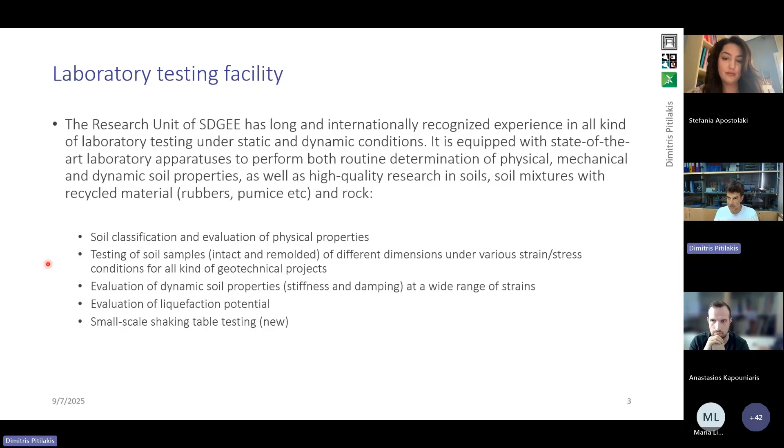Soil classification, testing of soil samples, evaluation of dynamic properties, evaluation of liquefaction potential, and a small scale shaking table that we are currently using. But again, as I said, Tassos Kapouniaris will talk about this more.

Then we have a big natural laboratory, as we say, where we do many kinds of field testing. So basically, the natural laboratory, as we call it, is outside of Thessaloniki, at the exact epicentral position of a big earthquake that happened about 45 years ago in Thessaloniki, in 1978.

This place is called EuroseisTest, and it provides an instrumented site to perform multidisciplinary studies in soil dynamics, earthquake engineering, engineering seismology, site effects, wave propagation effects. So it's fully instrumented. Imagine that it is the longest running instrumented array in the world because it has been in continuous operation since the early 90s.

And it is instrumented with approximately 25 instruments in three directions, north-south, east-west, and we are recording earthquakes down to the bedrock, which in this valley is at almost 200 meters. Then all these data are used as a basic input for research towards seismic risk assessment and mitigation.

So it inputs models. It is a valley which is very well known because we studied it for the last 30, 35 years. So we know the exact 3D geometry. And it produces a unique database of high quality seismic records. We have been continuously recording earthquakes since the early 90s.

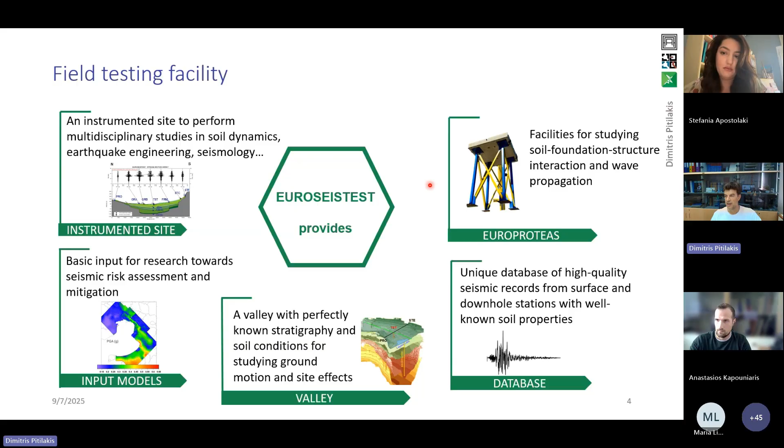This is the strong motion database that we have in our lab, and it records all the earthquakes that have taken place since the early 90s. It is open to the public, so anyone can browse and download earthquake recordings, small earthquake recordings so far, but if we are lucky, we are going to record also a major one.

Now, another big aspect that we have been working on is the field monitoring that we principally do in this EuroseisTest valley. So we are doing 2D and 3D geological and geophysical models with extreme detail, as you can see here to the right.

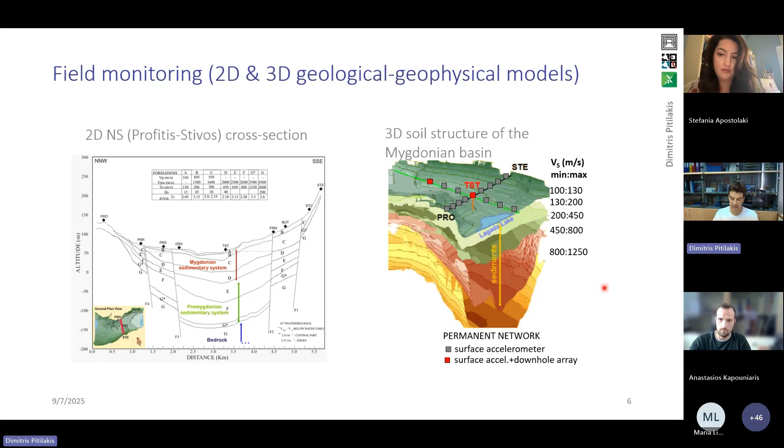Anything with geophysical tests, surface accelerometers, and downhole arrays down to the bedrock. Then another aspect of our research focuses on microzonation studies. We have performed microzonation studies, if I'm not mistaken, in more than 6 or 7 cities in Europe.

And we can get results or data that looks something like that. So this is, let's say, the spectral acceleration. This is Thessaloniki. This is actually the port of Thessaloniki. So this is the spectral acceleration as output from a microzonation study for a certain earthquake scenario. This is the spectral acceleration for a period of 0.6 seconds.

These are all useful information for big projects like the construction of the metro line, the underground, the subway line, which passed somewhere over here. And then they used our results in order to seismically design the tunnels and the stations.

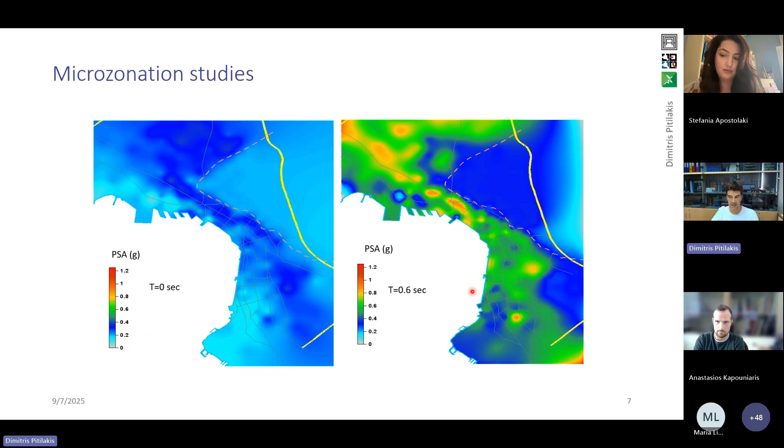Then moving forward, lately we have been working a lot on seismic vulnerability assessment. So we deal with cities. This is again the city of Thessaloniki, where for an indicative earthquake scenario, we have the damages in 5,000 buildings. Some of them are green, yellow, and red. This is traditional marking depending on the damages.

And again, here we can see an aggregated distribution based on the municipalities of Thessaloniki. You can see that, for example, these 26,000 buildings, most of them, 2/3 of them, are going to be yellow. So they are going to have slight to moderate damages.

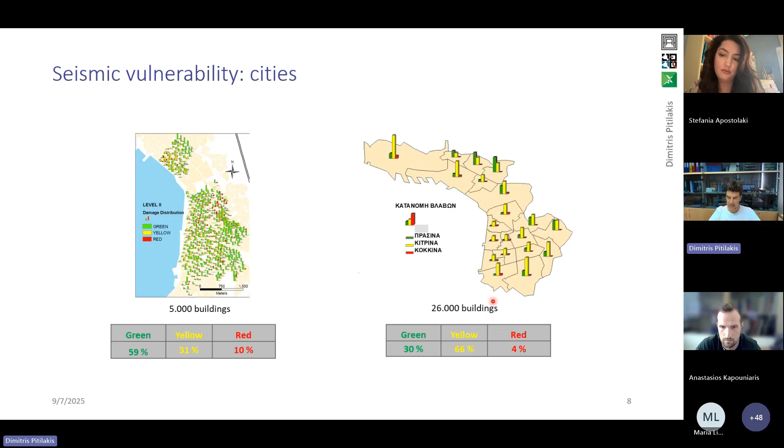Then we expanded our research to the seismic vulnerability of networks. This is important because, for example, everything is interconnected. So this is the road network of Thessaloniki, this is the bridge network of Thessaloniki, and we are starting to see what's going to happen, for example, in the road network if a bridge here to the, let's say, south of Thessaloniki has important damages.

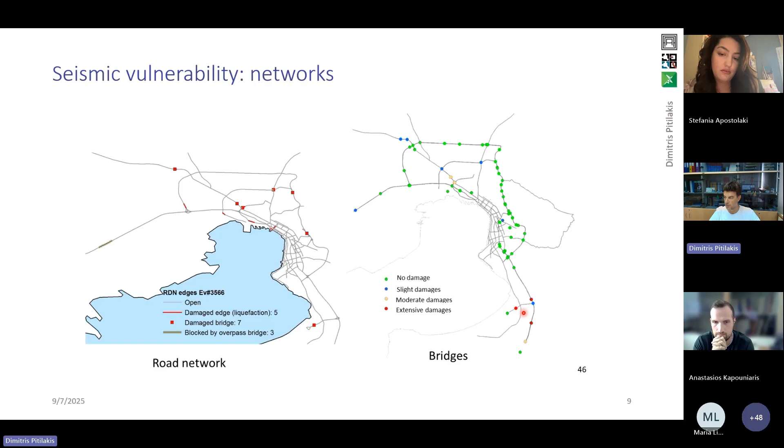Actually, this bridge here, where you see the laser pointer, is a bridge that connects the airport to the main road. So basically, in a given scenario of an earthquake, this bridge will be damaged, and this means that there is not going to be immediate access to the airport. So this is important.

Then we are studying systemic vulnerability. What is systemic vulnerability? It has to do with all kinds of lifelines. So basically, there are intra- and interconnected, intra- and interdependent systems. This means that, for example, in the water system, if there is an electricity breakdown because of an earthquake, then probably a pumping station...

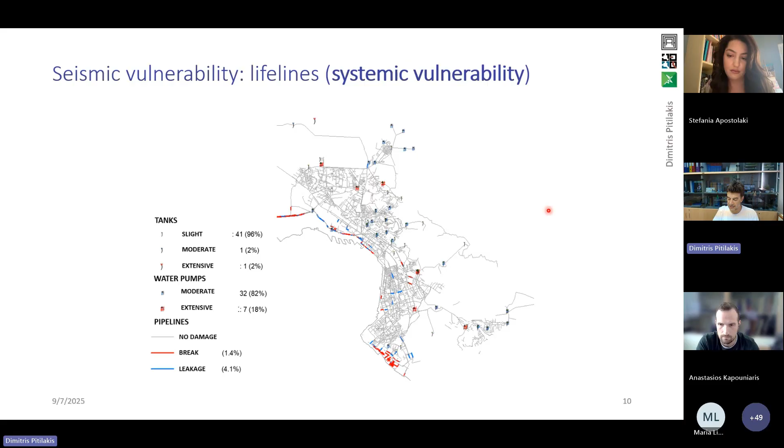Here is the water network, right? So probably a pumping station is not going to work, which means that if there is a fire because of natural gas somewhere in the city, maybe inside the pipelines there is no water in order to put out the fire. So this means that all the systems are somehow interconnected, and we have been studying this for the last 6 or 7 years.

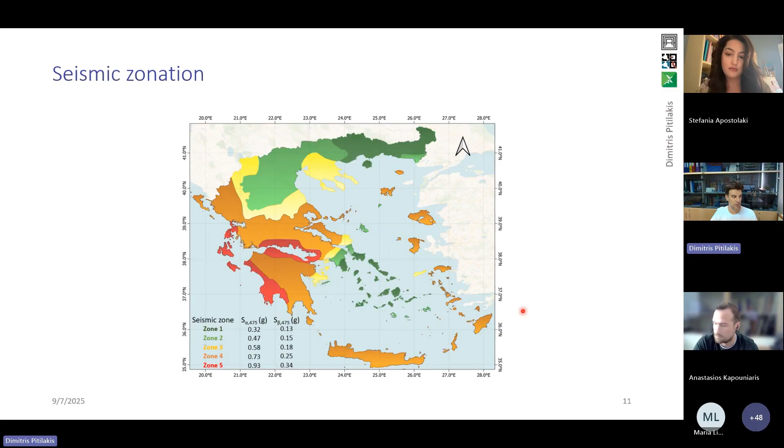Then another aspect of our research focuses on seismic zonation. Stefania will talk more about this. So depending on the region that we study, this is the whole of Greece, we are proposing updated earthquake hazard maps, zonation maps, in order for the engineers to be able to design the structures to resist earthquakes with as accurate a representation of the hazard as possible. But Stefania will talk more about this next.

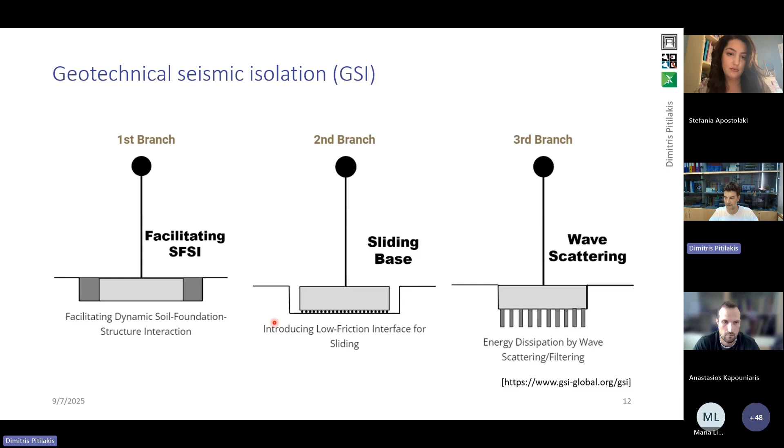Then another branch of our research is geotechnical seismic isolation. This is a very low-cost isolation that essentially focuses on intervening at the soil beneath the foundation or around the foundation. And we have been doing large-scale testing in Europroteas and EuroSeisTest.

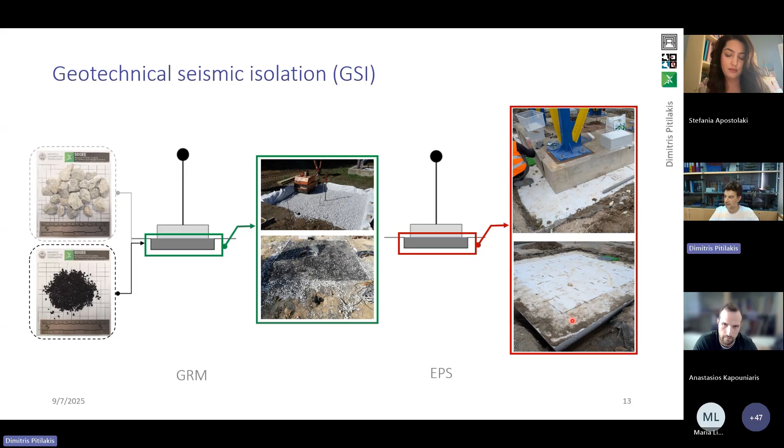Basically, we can see that here we are using gravel and rubberized tires, recycled tires, and we created a layer below the foundation. You can see here, this is more black than the gravel only on top. And then we placed the Europroteas structure on top, and we produced a shaking and recorded what's happening, the response. Here we did the same with EPS, expanded polystyrene, below the foundation.

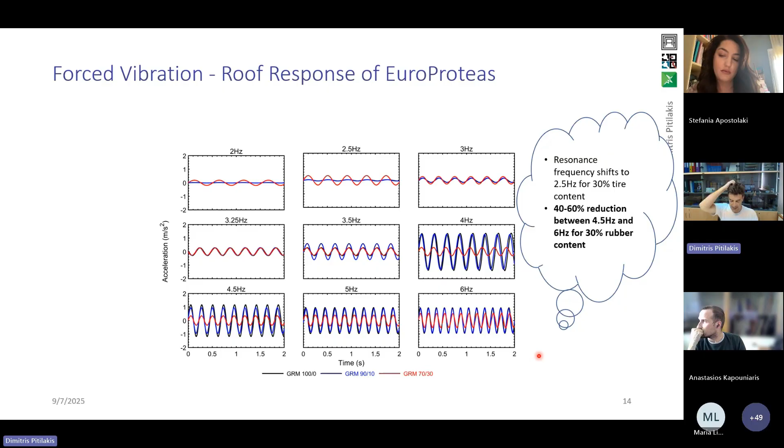So basically, we can see that using this kind of geotechnical seismic isolation, there is a reduction of 40 to 60% in the actual response, which means a reduction in the earthquake shear and moment forces that are transmitted to the foundation.

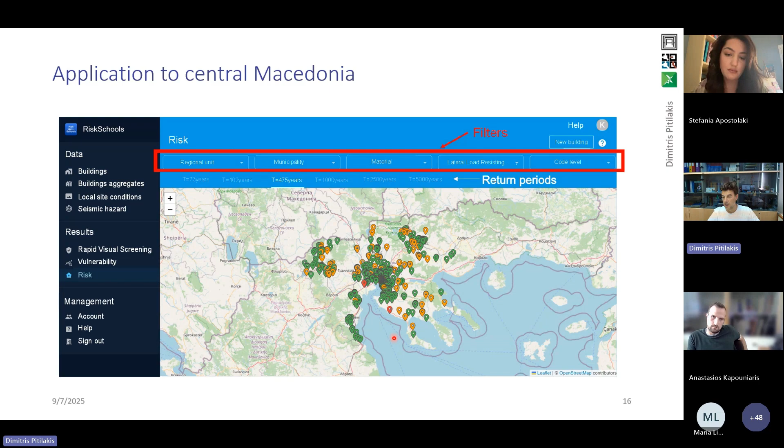It is something like 2,300 schools, and for a given hazard, let's say regional hazard, this is a scenario with a return period of 475 years, we can see that depending on the material and the lateral load resisting system that one inputs, we can have immediately the risk or the vulnerability, if you like, of each one of these schools. And this is very important for the prefecture, because then they can immediately go and assess, for example, the red buildings that need retrofitting or whatever the stakeholders think it's best to do.

Another thing that we have been working on is the urban scale risk assessment. Chiara is going to talk more about this. So basically, we've extended our vulnerability and risk assessment from a single structure to a city or a region. And this we do by including also soil structure interaction, so the presence of the soil. This, as you will see in Chiara's presentation, changes a lot.

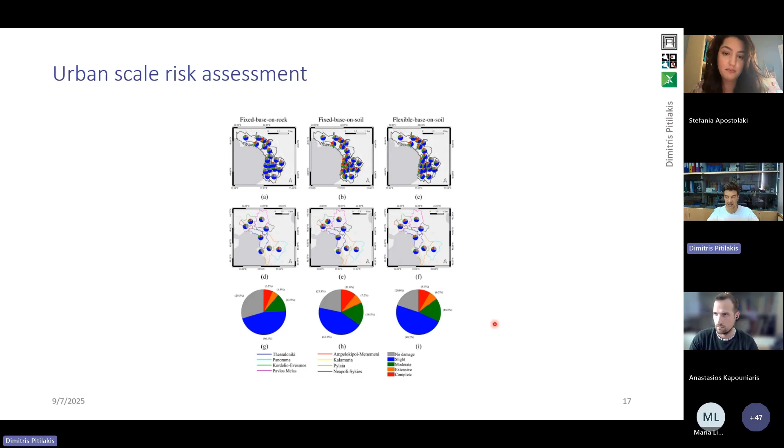Now, just in short, right now our laboratory is involved in 4 big European projects with a total budget of 2 million euros, maybe more than 2 million euros. And as a very conservative estimate, we have participated in more than 30 projects, mostly European, national also, with a total budget of more than 10 million euros in research targeted towards geotechnical earthquake engineering and risk assessment.

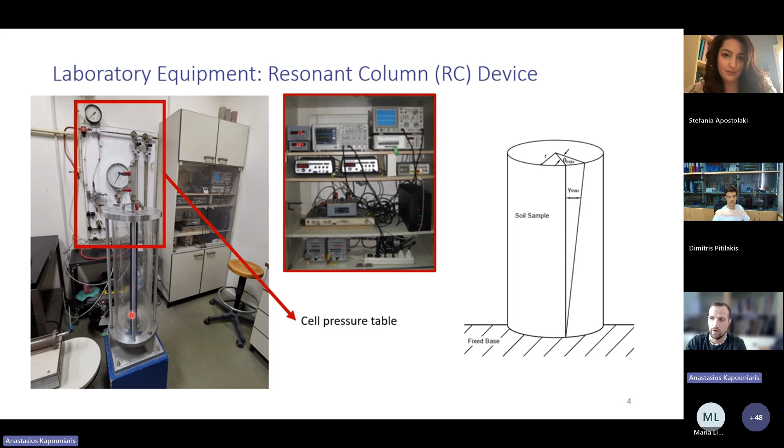And this here is the electronic equipment where we can adjust the function of the devices and actually make the estimations that I'm gonna talk to you about later. So

This device has the ability to work in both torsional and longitudinal excitation. As you see here in this picture, this is a soil sample. We have fixed the base, and on the top, we can apply either a torque, like a sinusoidal torque, a harmonic torque, or of course a longitudinal force. In that way, as I can show you in the next slide,

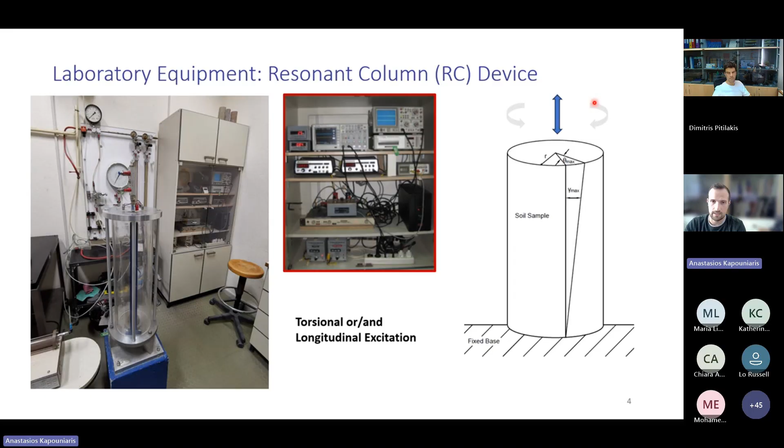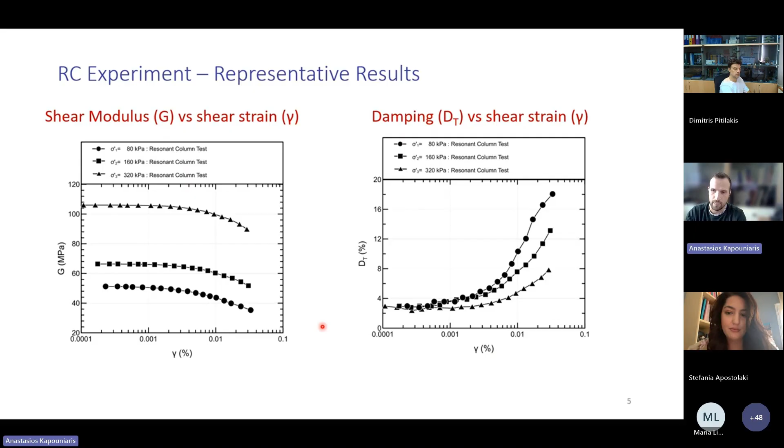we are able to measure the reduction curves of the shear modulus and also the damping of the material, as we call it also G-gamma-D curves, shear modulus, shear strain, damping curves. Here in these diagrams, you can see on the left there are shear modulus versus strain and damping versus strain for sand specimens.

Next, we have a new cyclic triaxial device. We have performed many tests, more than 500 tests. It's fully PC digitalized, and all the data or the results are gained via PC. Of course, we use cylindrical specimens. It has many abilities. And of course, there is the option to add bender element tests, which are gonna be more specific later.

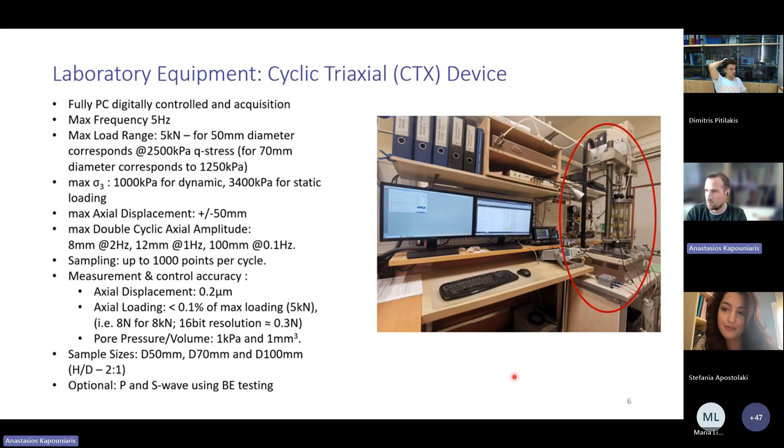For cyclic triaxial experiments, now I'm showing you some representative results that we have made in the past. These are two types of tests that we perform. On the left, there are the strain-controlled tests, where we can calculate shear modulus or elastic modulus and damping parameters. From these stress-strain loops here, we can go to these diagrams, which are shear modulus and damping versus the strain. On the right, of course, we are able to perform stress-controlled tests in order to define the liquefaction potential, mostly for granular soils, sand soils, etc.

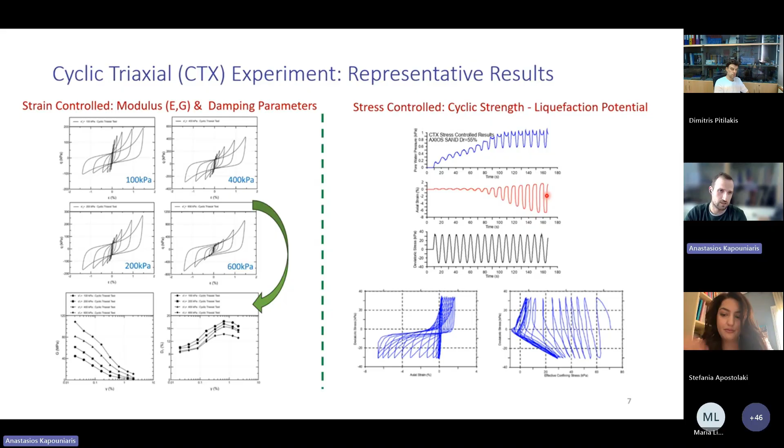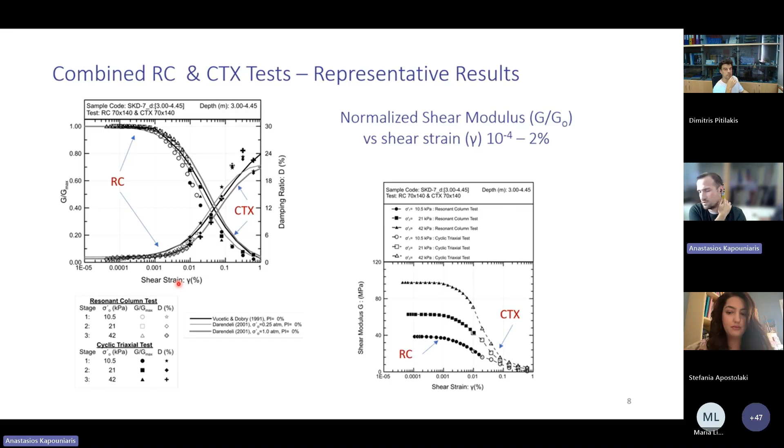So, of course, in our lab and with our experience, we are able to combine resonant column and cyclic triaxial tests. As you see in these diagrams, we have combined tests for the same material, a sand material. On the left of the diagram are results from resonant column tests, and on the right, there is the cyclic triaxial test. Of course, the reduction curves of the shear modulus and the damping increasing with the shear strain. It's a very common picture.

Next, bender element tests, a new way to define the shear wave velocity or the primary wave velocity, of course, under confined pressure. It's a non-destructive method. This is the soil specimen or a rock specimen, whatever we want to test, and we apply the wave that we want. We have a transmitter and a receiver, and we can apply either S waves or P waves. And it's very easy for us to do it in the same specimen; these tips are used for both S and P waves. So it's very adjustable.

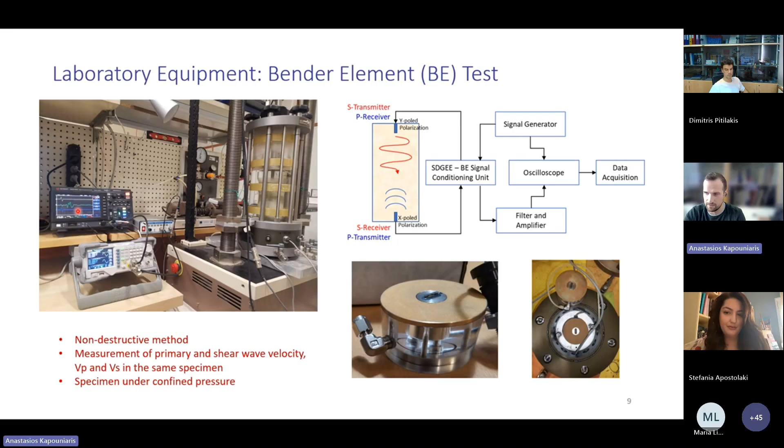As you can see here in this picture, it's showing a pulse, and then this green line here is the receiving pulse. As you can see also here in these diagrams, this blue line here is the pulse that we send, and this orange line is the receiving pulse.

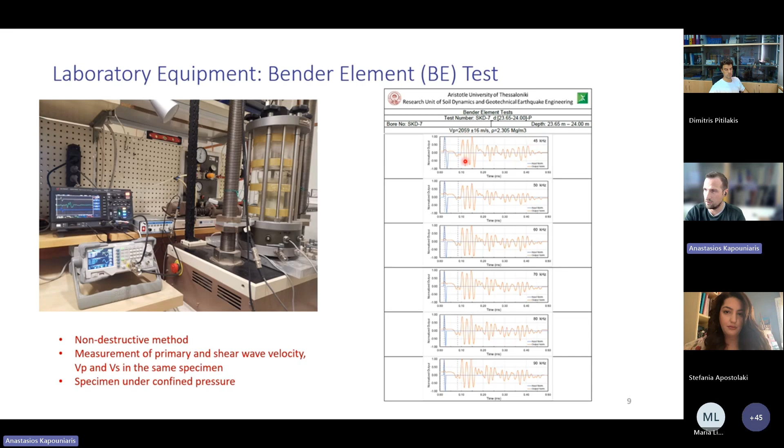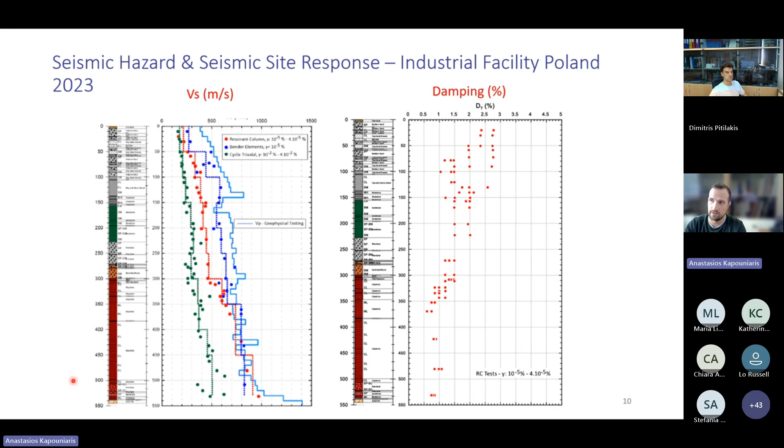From our work, we are able to make these profiles with depth and calculate the VS and the damping with depth. As you can see here, this is a borehole of more than 500 meters for an industrial facility in Poland. So

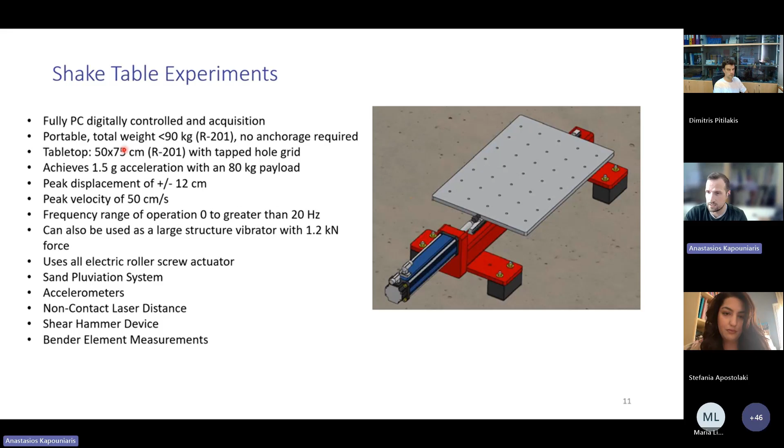let's continue to the shake table experiments. As Dimitris mentioned, this is a new device that we have installed in our lab. It's actually small, mostly for academic purposes, and it is uniaxial. It moves only in one axis, and it has a payload of almost 80; we can adjust it to 100 kilos and perform acceleration up to 1.5 g, as you can see here in the bullets. So I'm not going to go into the whole details of the equipment.

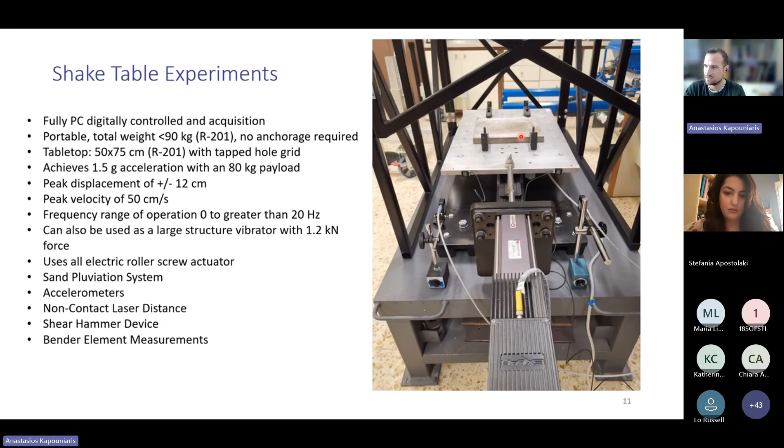This is a closer picture of the shake table in our lab. This is the actuator that moves the table, and you can see there is a steel plate above the table because we were doing some calibration in the past in order to calibrate the mass and the force.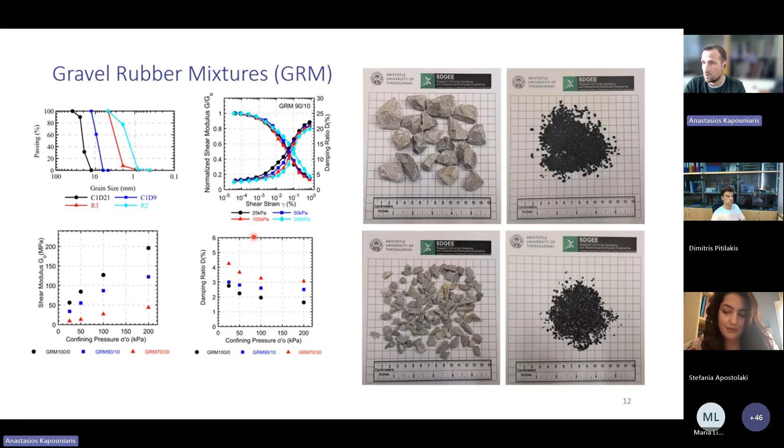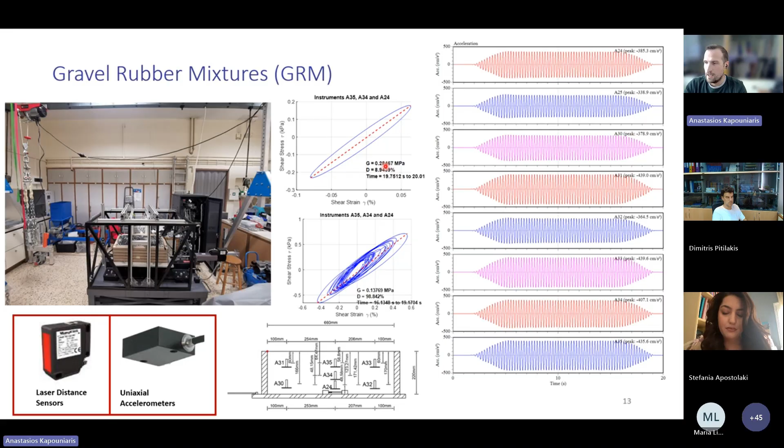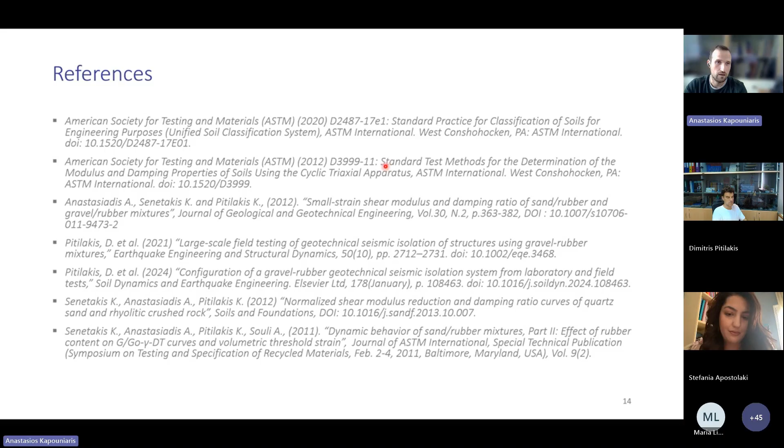As you see here in these diagrams, these are some results where we were able to determine shear modulus and damping from these tests. Of course, the work is still ongoing, so in the future there will be more results published in a journal. That's all for now. These are some references from our work and some standards that we use when we carry out the experiments.

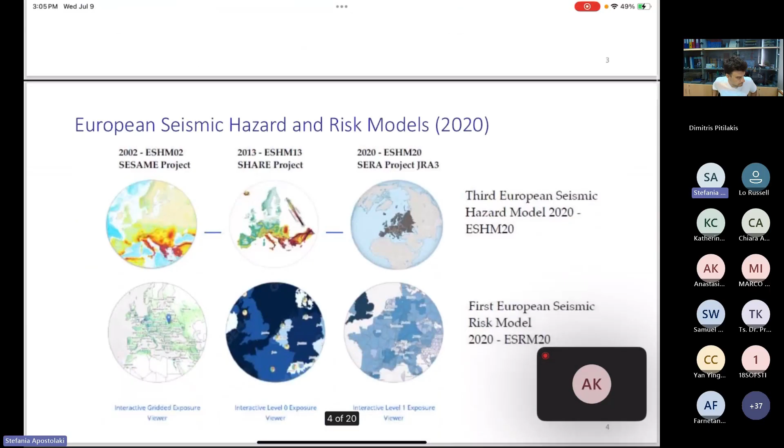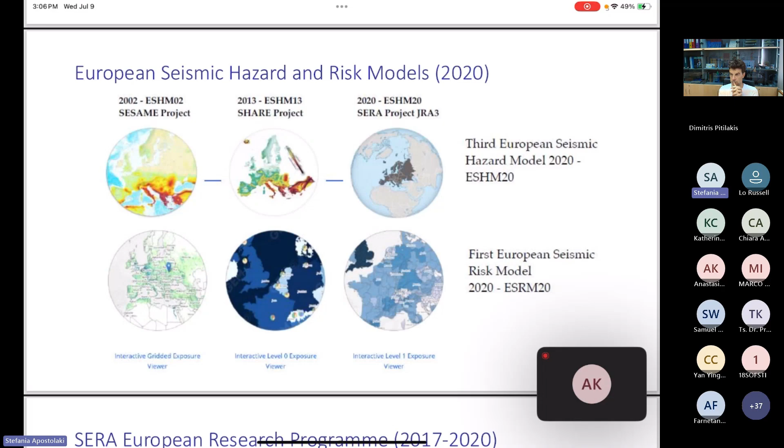Let's begin with ESHM20. ESHM20 is essentially a major update of the seismic hazard assessment in the Euro-Mediterranean region. It covers the whole of Europe and Turkey. It is a successor to a previous model, ESHM13, developed in 2013, and it supports the first European seismic risk model, ESRM20. These models have received funding from the European Union's Horizon 2020 Programme under the SERA project, and in this project many research teams across Europe collaborated with the Global Earthquake Model Foundation and the European Plate Observing System. Our team at Aristotle University of Thessaloniki, as Dimitris mentioned, was strongly involved in this effort.

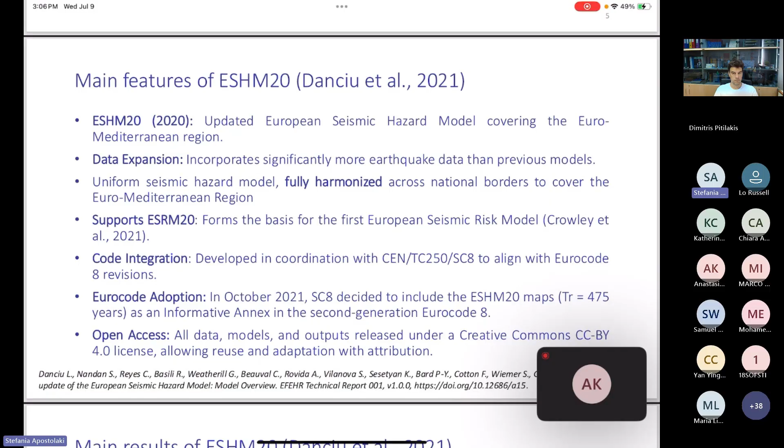So the main feature of ESHM20 is that it relies on a fully probabilistic framework. It incorporates significantly more earthquake data than previous versions. One of its main strengths is that it is fully harmonized across national borders, and a major objective was to align its outputs with the needs of the revised Eurocode 8 by working closely with the subcommittee of the European Committee for Standardization that is responsible for Eurocode 8.

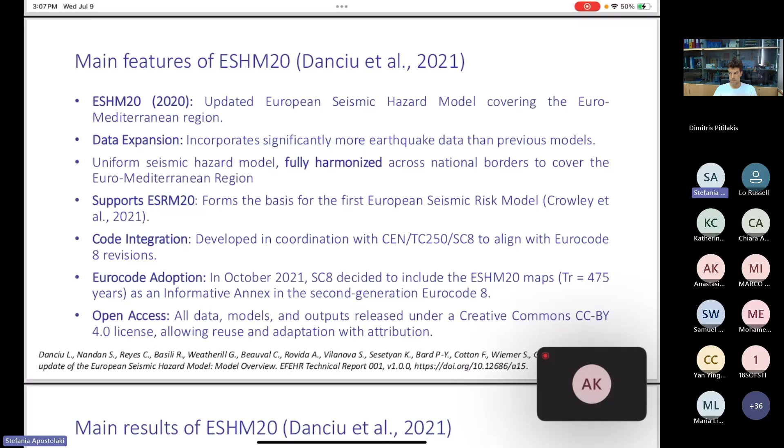In 2021, this subcommittee decided to include maps of ESHM20 as an informative annex in the second generation of Eurocode 8. All data, models, and outputs are freely available through the site shown at the bottom of this slide. Let's see the main results of ESHM20. The main results are more than 500 hazard maps for various intensity measure types, such as the PGA, which is the peak ground acceleration.

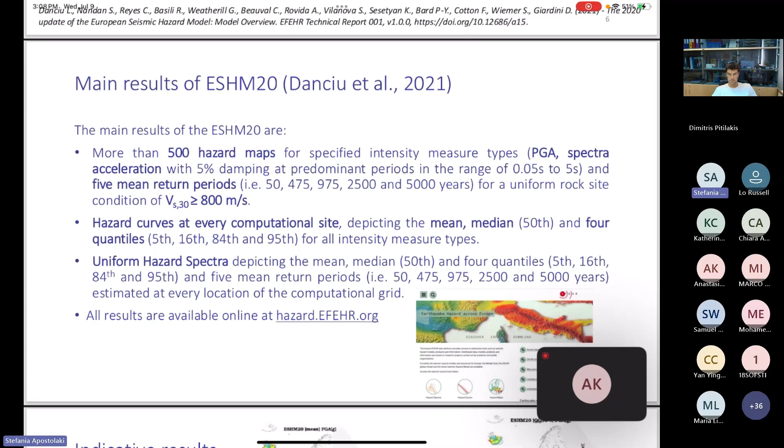It is a common metric, and spectral accelerations for various periods, and for 5 mean return periods from 50 to 5,000 years, and for rock conditions. Other results are hazard curves and uniform hazard spectra for every site, so for every location included in the study area, which is the whole of Europe and Turkey, at a dense computational grid. So we can have this information at every location.

Let's see some indicative results. These are maps of the peak ground acceleration, PGA, for a commonly used return period of 475 years. This is a very common return period. This represents the expected levels of PGA for an earthquake that happens roughly once in 500 years.

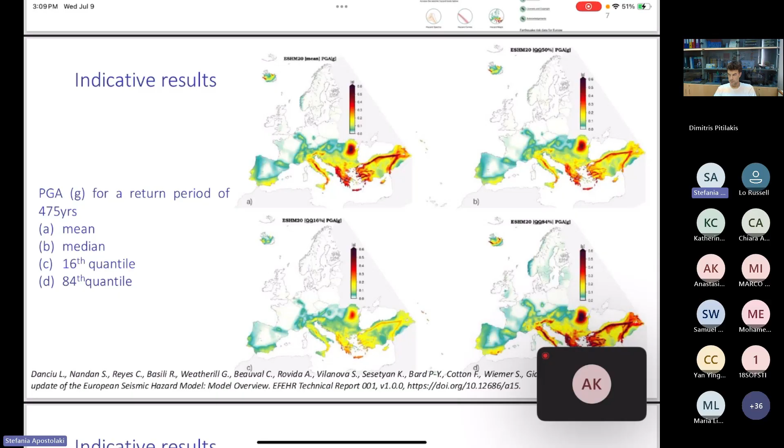Let's begin with the current zonation map. This map is included in the Greek National Annex of the current version of the Eurocode 8. It is in force since 2003, and it divides Greece in 3 seismic zones with PGA values of 0.16 g, 0.24 g, and 0.36 g.

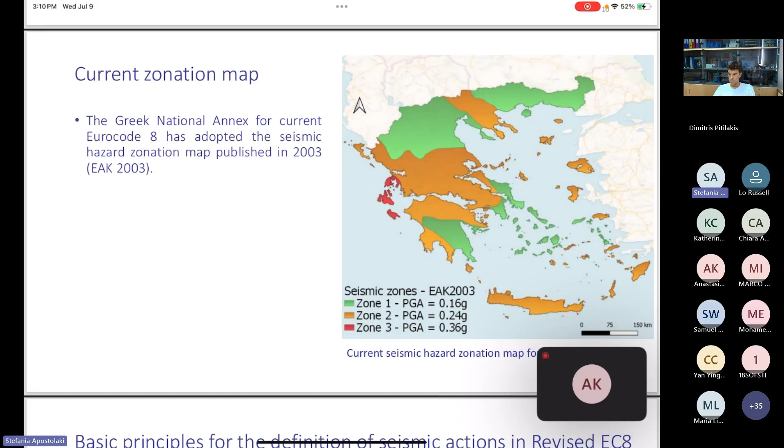In the upcoming revision of the Eurocode 8, significant changes are expected in the way that the seismic actions are defined. Now the basic parameter will not be the PGA, but we will need 2 other parameters: the S alpha, which is the maximum spectral acceleration that corresponds to the constant branch of the elastic response spectrum, the plateau value, as we used to say. This value is linked with the PGA by a factor F, capital letter A, which is almost equal to 2.5. So PGA is S alpha divided by 2.5.

And the second parameter that we will need is the S beta, which is the spectral acceleration at a vibration period of 1 second. We will use these 2 formulas here for the calculation of the S alpha and S beta. First, we will need the S alpha RP and S beta RP. These parameters will be included in the national annexes of each country, and they will refer to a specific return period, let's say for the 475 years, and for rock conditions. To these parameters, we will apply the soil amplification factors F alpha and F beta, and a topography amplification factor Ft.

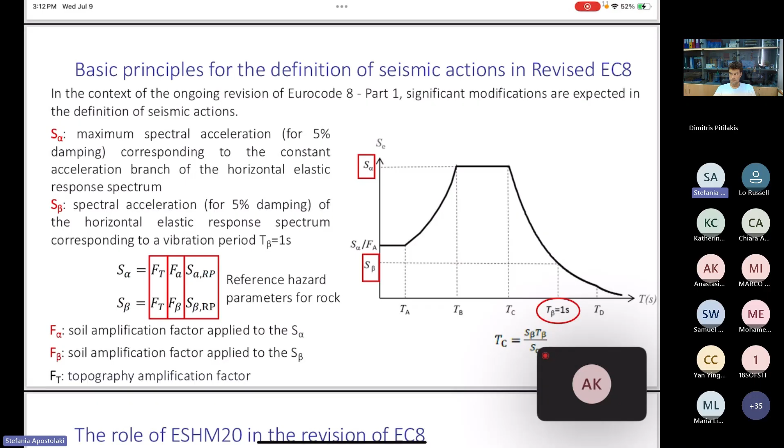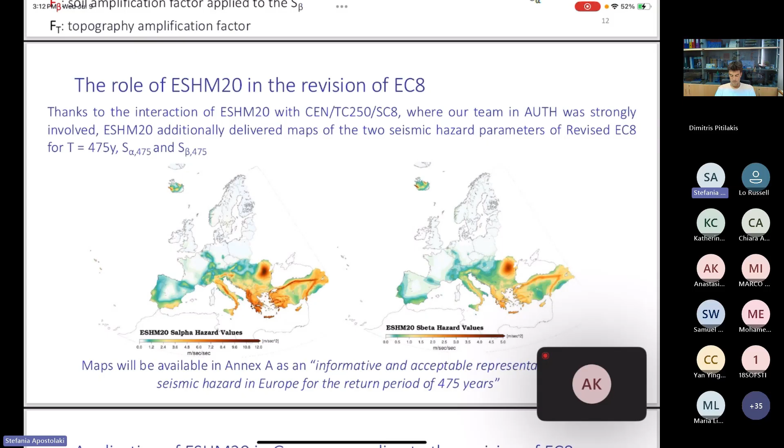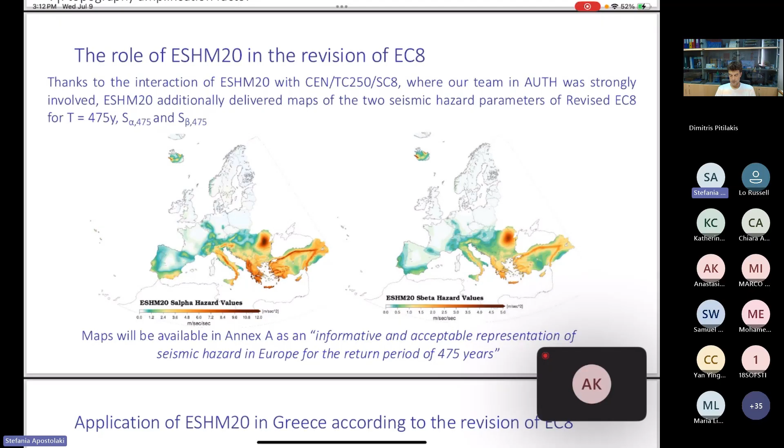So the role of ESHM20 in the revision of Eurocode 8. ESHM20 will provide maps for these 2 parameters, the S alpha and S beta, for the commonly used return period of 475 years and for rock conditions. These maps will be included in the annex of the main text of the Eurocode 8 as an informative and acceptable representation of the seismic hazard in Europe.

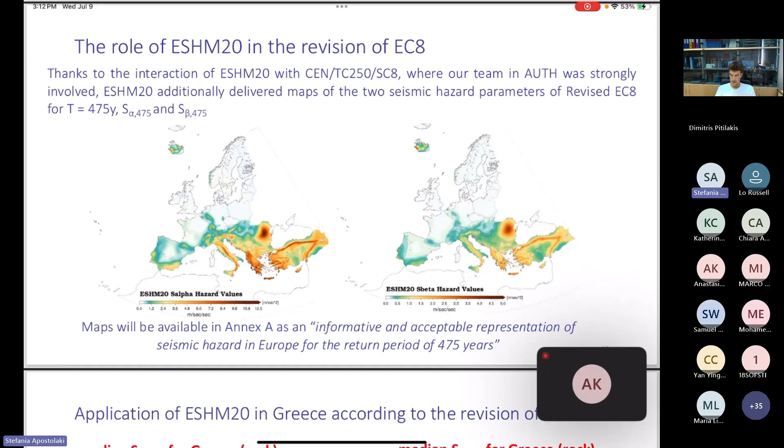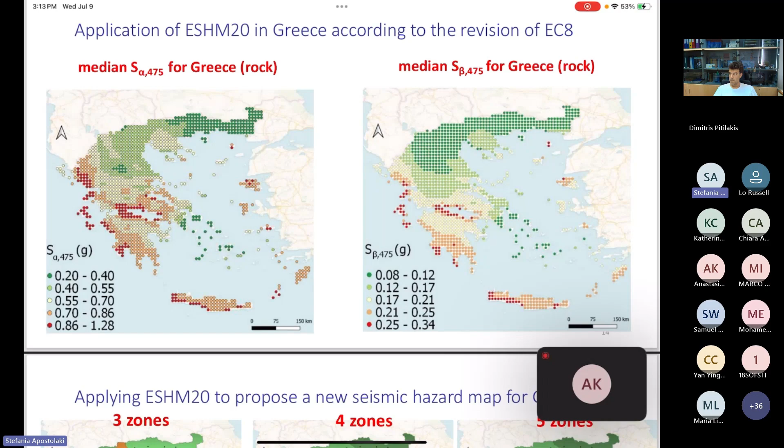So we have here the S alpha on the left and the S beta on the right for the whole Europe. And these are the same maps when we zoom in on the Greek territory. We have the S alpha on the left and the S beta on the right. We decided to base our zonation on the S alpha values on the left, as this parameter is more crucial and more relevant to our building stock here in Greece.

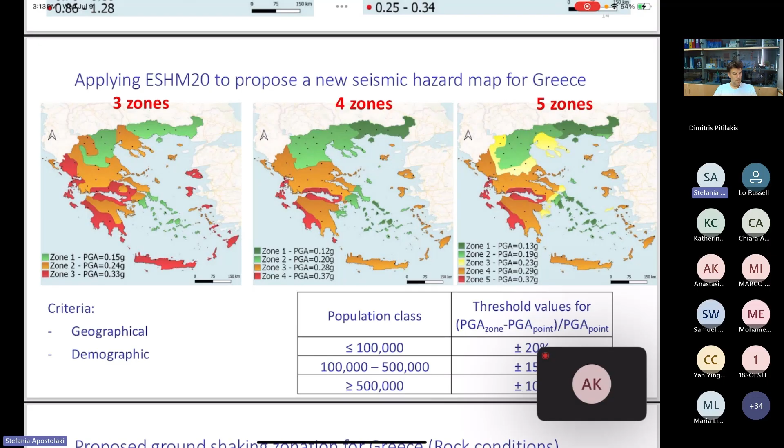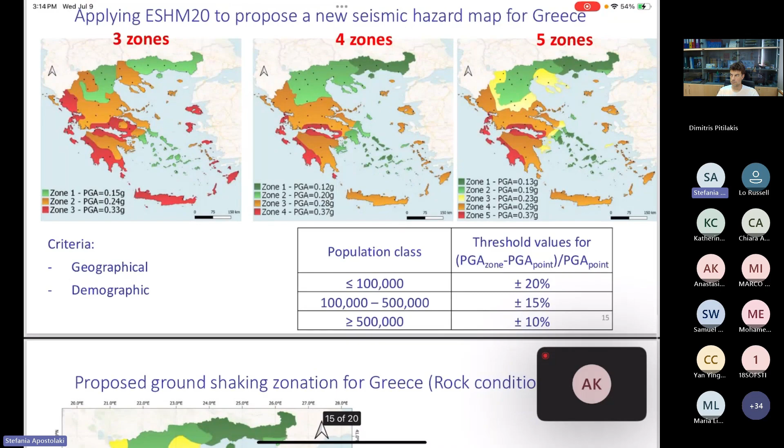At each step, we tested how well the zone average values match the point-specific PGA values by calculating the ratio shown in the table here in the bottom. And to ensure that the zonation is representative and fair, we calculated this ratio for each location of the 60 major cities in Greece, and we introduced population-based criteria. For example, for big cities with over 500,000 inhabitants, we require this threshold to remain between plus or minus 10%. This iterative process improved the match with the ESHM20 data from the initial 3 to 4, and finally to 5 zones.

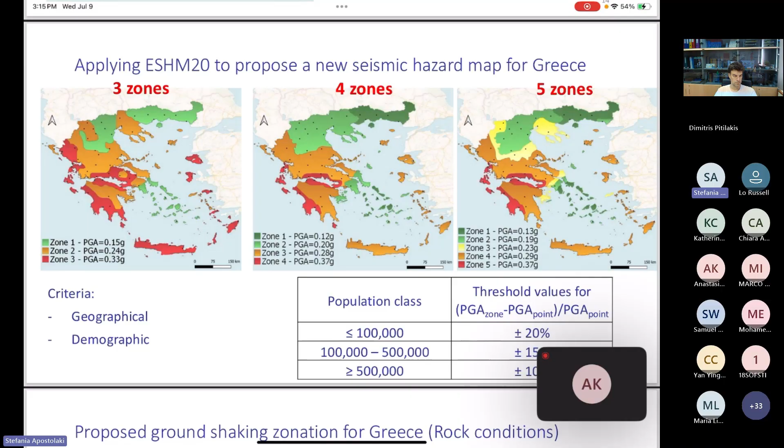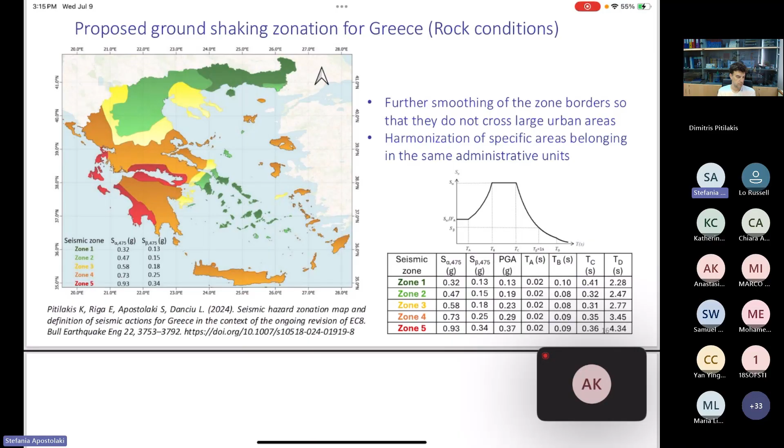The last 5 zone map satisfies all the criteria and is therefore our proposed zonation map for the Greek national annex of the revised Eurocode 8. You can see the map here. And we calculated for each zone all the parameters needed for the calculation of the elastic response spectra. You can see also the table here.

So to sum up, I believe that the most important points to mention are the proposal's official submission for potential inclusion in the Greek national annex of the Eurocode 8, and the need to consider some practical adjustments if the map is officially adopted.

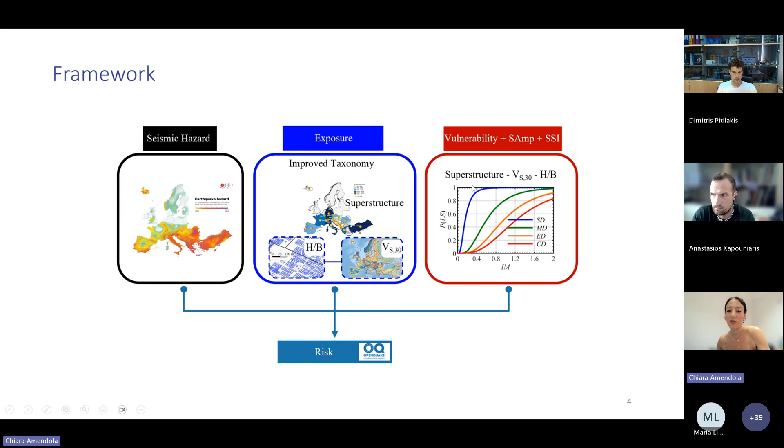Then we need the fragility or vulnerability functions, and these need to be developed considering soil structure interaction. For this reason, what we have done is to compute fragility functions considering a single degree of freedom system, and now we updated this to a multi-degree of freedom system. Once considering soil structure interaction, so with the system of springs at the base, and once considering the general approach that is the fixed base assumption.

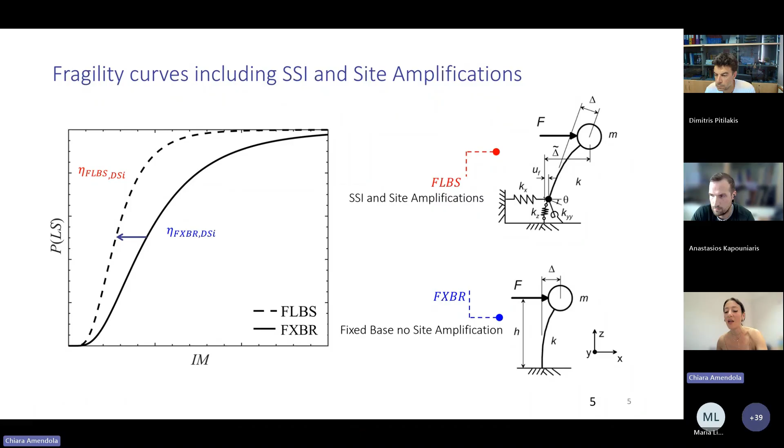In this way, we can end up with two sets of curves, the fixed base that here are the continuous lines, and the flexible base that in this case are the dashed ones. As you can see, for example, here there is an increase of the fragility because the dashed curve is on the left-hand side. In general, when we account for soil structure interaction, depending on the kind of structure, but especially the fundamental period of the structure in relation to the dynamic characteristics of the input motion, the properties of the soil, the characteristics of the foundation, and more in general, the interacting system, you can have an increase or a decrease of the fragility function with respect to the fixed base assumption.

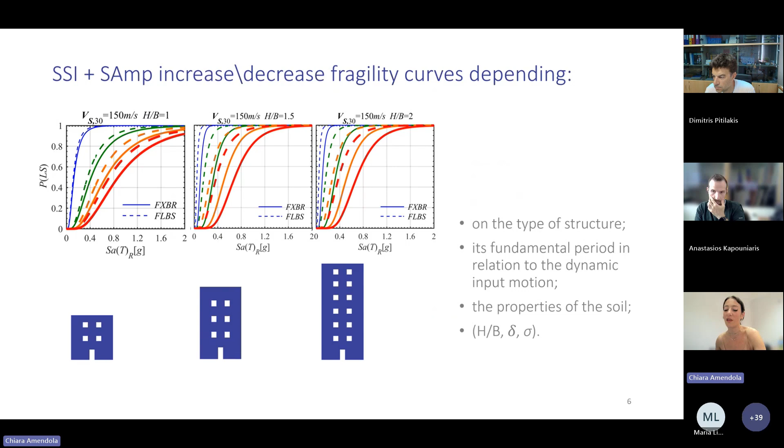We say that we have to also modify what is the general exposure model. And to do this, we provide in our GitHub page the tools to modify the exposure model in order to account also for the foundation and for the soil.

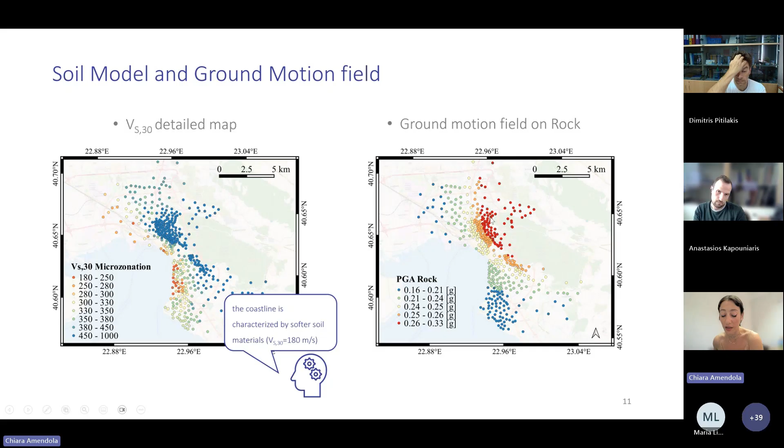Now, just to have some information about the characteristics of the case study, on the left-hand side you can see the distribution of VS30 within the city, and just a focus on the fact that on the coastal line, so close to the sea, we have the softer soil profile, while on the right we can see the ground motion field on rock, computed with the OpenQuake software, and as you can see, the largest intensity measures are towards the epicenter.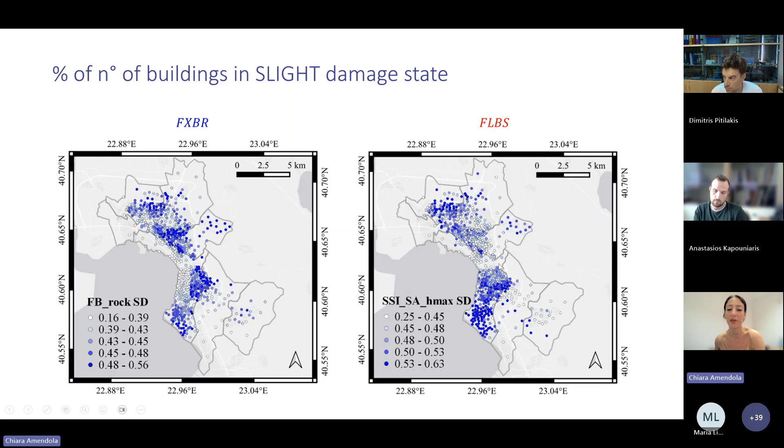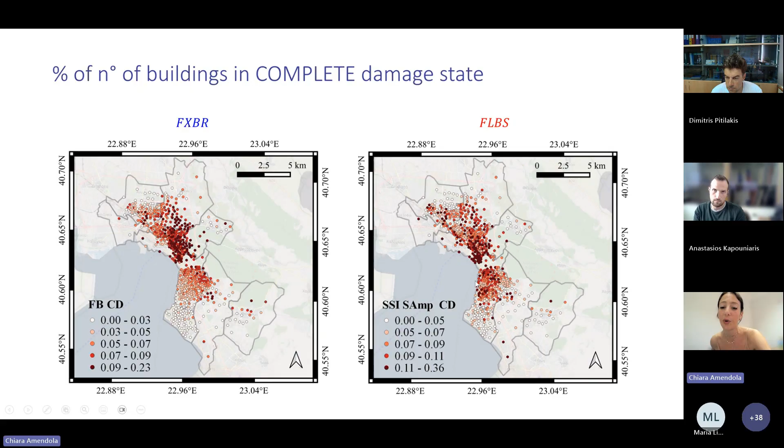Now, if for this event we compute the damages for the two cases, so on the left considering the fixed base assumption and on the right considering soil structure interaction, you can see that first of all, there is a different distribution of damages. These dots represent the percentage of number of buildings, for example, here in the slight damage state, in the next slide in the complete damage state, and just to highlight that, if we see what happens on the coast for the fixed base on rock assumption, we will see less buildings experiencing this complete damage state, while if we consider soil structure interaction, the number will increase.

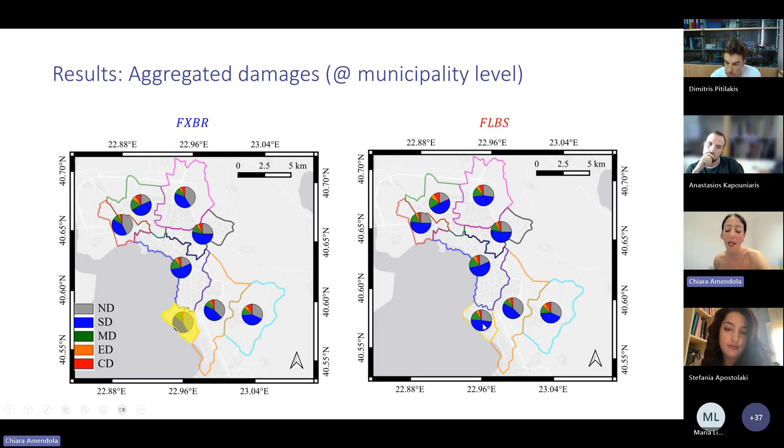All in all, we can also aggregate these results, and even from this pie chart, you can see that the distribution is different. If again we focus on the coastal line, in the district of Kalamaria, you can see that the pie chart from the left and the right hand side will change. Here there is an increase in general of buildings in the higher damage state.

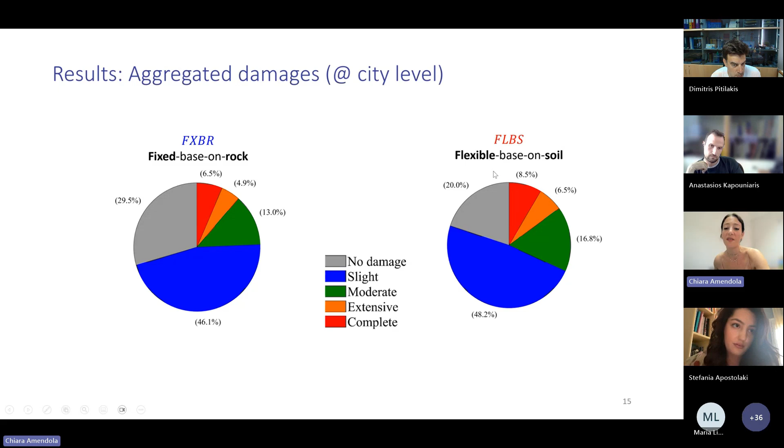And again, if we aggregate everything to see what happens at the city level, for this application, so for the historical earthquake in Thessaloniki, when we consider soil structure interaction, we will have an increase of the percentage of buildings, for example, experiencing the complete damage state.

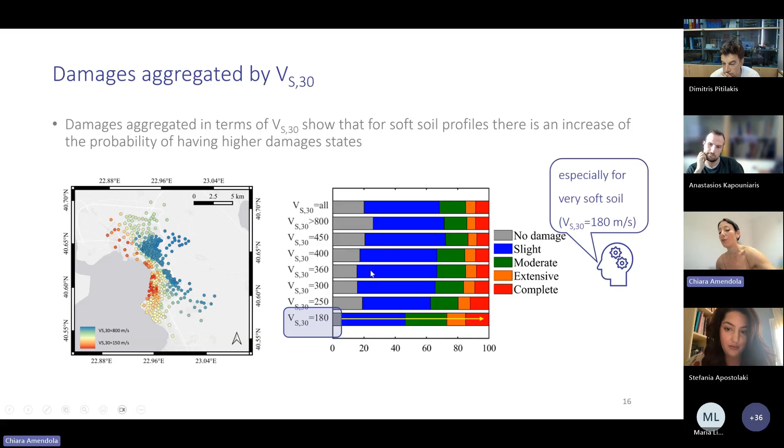Now, another important thing to understand the results is that if we aggregate the damages in terms of the VS30 where the building is resting, we can see that for all the buildings that stay on a soil profile with a velocity of about 180, so very soft soil profile, there is an increase of the probability of having higher damage states. So in this case, we have an increase of the damages.